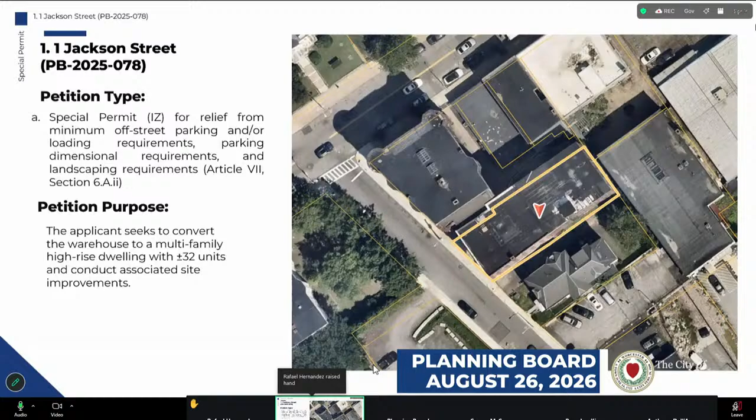Donald O'Neill, lawyer here in Worcester, here this evening on behalf of the applicant, in this case, Jackson Street Apartments, LLC. Also with me is Michael O'Rourke, who's the manager and principal of Jackson Street Apartments, LLC. Available online is Rafael Hernandez from Acropolis Design, who has prepared the architectural plans for this project, and Victoria Epstein from Creighton Manning Engineering, who did the transportation management plan. She is available for any questions you may have for her.

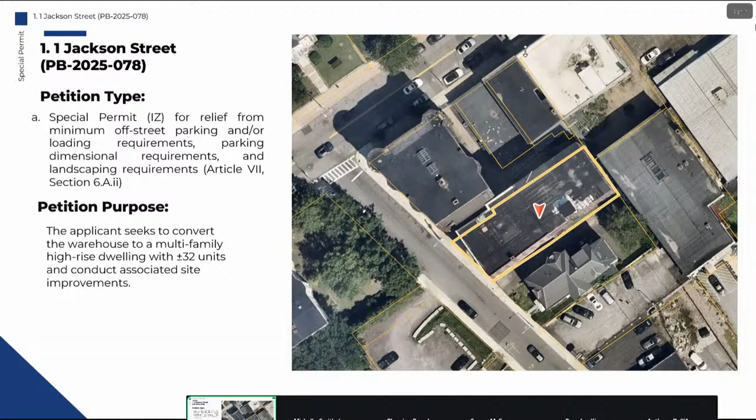I did speak with both of them. There were a couple of questions we had from staff today regarding the architectural plans, which Rafael is here for, and Victoria can address any questions regarding the transportation management plan. One of the conditions of approval we'll get to is for an updated plan reflecting the change in the percentage of units which would be affordable, and she can address any questions you may have concerning that. This property is an existing old apartment building that was eventually converted into warehouse use in, we believe, 1969.

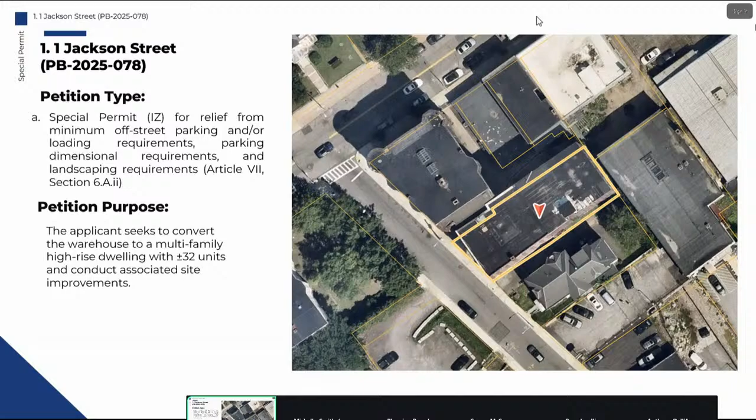Upon original construction, it was 5 apartments, 1 for each floor. The records indicate that in 1912 or 13, it was converted to 12 apartments and remained in that configuration until 1969. What we're looking to do now is convert back to 32 apartments. The breakdown on those apartments is 9 studio units, 14 one-bedroom units, and 9 two-bedroom units.

There is no parking available on site. Basically, the building occupies pretty much the entire lot. So what we're seeking from the board is a special permit for a reduction of 16 parking spaces. We have already been to the zoning board and had a reduction through variance of 20 parking spaces for that location.

This special permit we're requesting now is available to the applicant because of the inclusionary zoning compliance that we have submitted. The idea basically is these apartments would be rented to people without cars. There is no available parking on site. However, there's a need for apartments, particularly ones with an affordable component, and in fact this unit may have a greater percentage than the formal requirement needed for the inclusionary zoning.

It's a strong likelihood that the percentage of actual affordable units would be greater than that. However, they would not be deed restricted for the 30-year period. People would know going in that there is no parking, so they wouldn't rent, or they would make their own arrangements with respect to parking off-site in a garage or some other location.

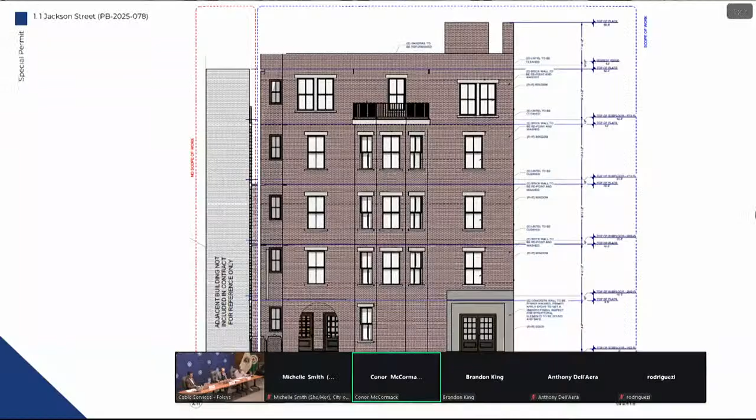Mr. McCormack, it is a public hearing, if you'd like to make a motion. All right, I make a motion to close the public hearing. Second? On the motion: Mr. McCormack, yes. Mr. King, yes. Mr. Dell'Aera, yes. Mr. Toomey, yes. I vote yes. 5-0, hearing is closed.

I would make a motion to approve the special permit for 1 Jackson Street, subject to staff recommended conditions of approval on pages 2 and 3 of the staff memo, with amendments to condition 6 regarding the bicycle spaces, and to incorporate the DTM memo dated July 17th, noted in condition number 2.

Second? On the motion: Mr. McCormack, yes. Mr. King, yes. Mr. Dell'Aera, yes. Mr. Toomey, yes. I vote yes. 5-0, that motion passes. Thank you very much.

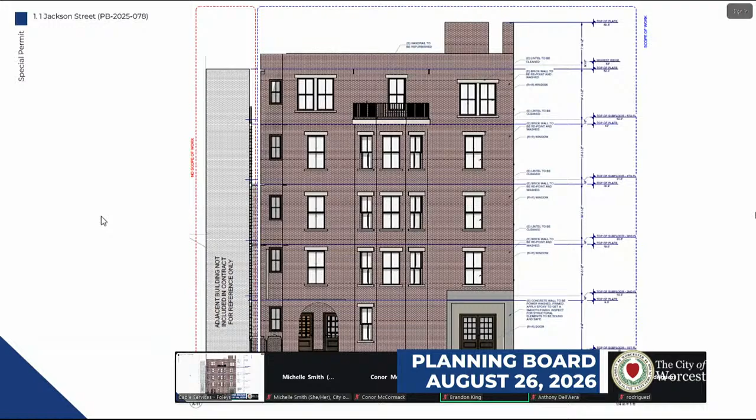Next item on the agenda will be item number 3, 25 through 27 Perkins Street. This is a public meeting for a definitive site plan and a public hearing for a special permit for relief from minimum off-street parking and/or loading requirements related to inclusionary zoning.

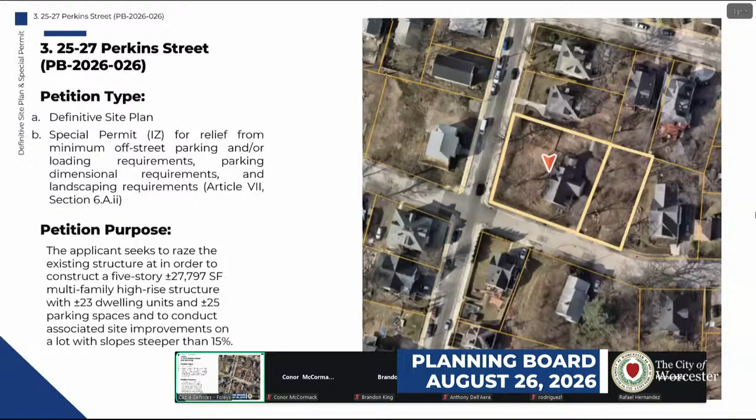Good evening. My name is Jacob Lemieux with Hancock Associates at 315 Elm Street in Marlborough, Mass. I'm the civil engineer on the site project. Also on the phone today is Acropolis, who is the architect. Are you able to pull up the— oh, you've already got that up. So essentially the petition is the demolition of the existing 3-story, 3-unit building and the construction of a five-story, 23-unit building.

under the inclusionary zoning benefit parking reduction regulations. We're proposing 23 units, 5 affordable units with 25 parking spaces proposed inside the building. There are 2 site driveways. The building is steeply sloped up as it goes up Perkins Street, so the building is sort of tiered into that slope, as you can see here. There are 2 curb cuts from Perkins Street that lead to the 2 levels of garage.

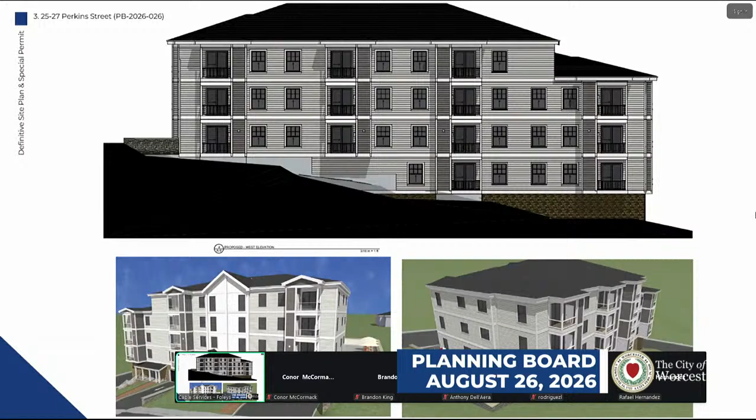Yeah, this is good. Can you go to the Perkins Street side? Or, oh, this is Perkins Street, looking up towards Perkins Street. If you want to go to the next slide—these are the views from Perkins Street on the bottom left-hand corner, and from the abutting house to the north on the bottom right-hand corner. There's an external patio area there, outside of the building for residents, that sits on top of the parking garage underneath it, which helps bring the massing of the building back further away from that property line while maintaining some structured parking there.

If you want to go back to the site plan. So near the main entryway, we've got proposed parking, or bicycle parking spaces, for about 10 bicycles. We've also got about 15 inside as well. So that would be about 25 bicycle parking spaces inside and outside of the building. If you want to go to the next slide.

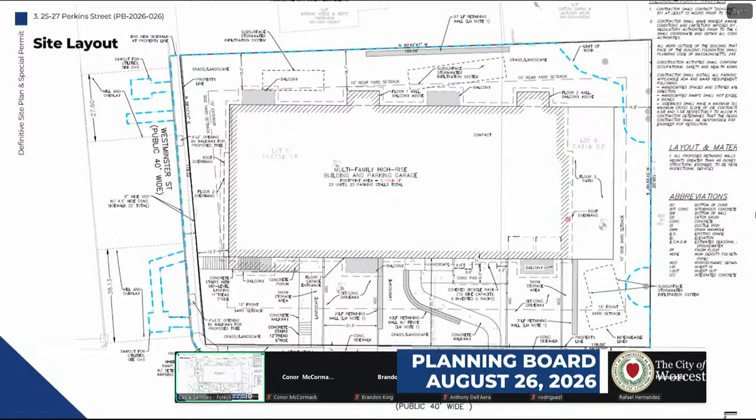Stormwater management on site is just handled by 3 small SC310 chamber systems, which are chambers buried under the ground that provide stormwater storage. We're providing treatment to the runoff that we're generating on site, and also reducing or matching the flow rates to the municipal system to what currently exists.

If you want to go to the next page. We're also providing a robust planting plan. We've got landscaping all the way around the structure, a landscape buffer buffering the patio area, and taller landscape buffers on the other side to help hide that taller wall section. We've also got a staircase that goes to Westminster Street, so there's some pedestrian tie-in to Westminster Street from the entryway. If you want to go to the next sheet—this is just the maneuvering plan.

So I was hoping you had the photometric plan.

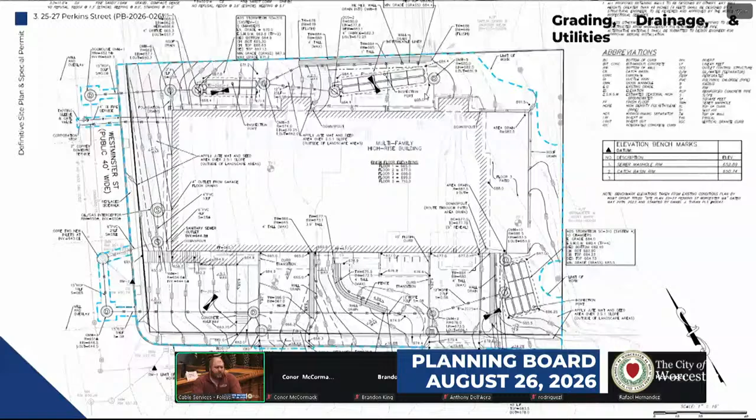Oh, the trash, yes—there's an internal trash room, if you go to the second floor, it would be in the architectural plan. Up one—yeah, right there is a trash room that the trash will be kept in.

Okay, the only other thing I thought you might want to mention, there's a question about adequacy of both fire hydrants and utility availability. That seems like it's under your purview. Yeah, and we have adequate flow capacity there. There's an 8-inch water main, which is certainly sufficient size for a project of this type. And this project's been reviewed by the DPW, and they're satisfied that the available utilities will be sufficient for the project.

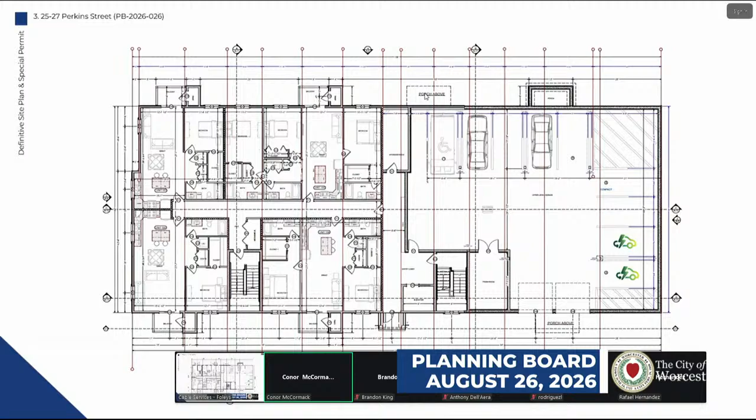In terms of the site plan, I think the applicant did a fairly good job constructing a building of this size on the site. I did have one question. The ground floor along Westminster Street, what's the material for that? It kind of looks like a foundation, and I'm curious what that would feel like along Westminster Street. I just didn't want it to look like a basement facing the street.

Rafael Hernandez, Acropolis Design: Yeah, it's a stone veneer material, and there will be openings on that facade for windows, so it shouldn't feel too much like a high barrier wall. It'll be a natural looking material. It hasn't been finalized, but it's probably going to be Boral, a product mechanically fastened to concrete so we don't have a lot of exposed foundation. It looks natural and will tie to the ground and the landscaping around it.

Okay, thank you, I appreciate that. I just wanted to make sure there was a little bit of fenestration along that frontage. I was concerned about the Westminster side, but I see there are some windows there, so that plus the landscaping satisfies my concern. I do appreciate this is a much larger building than what's typically in the area, but it complies with the site plan review requirements, and I would be willing to support it.

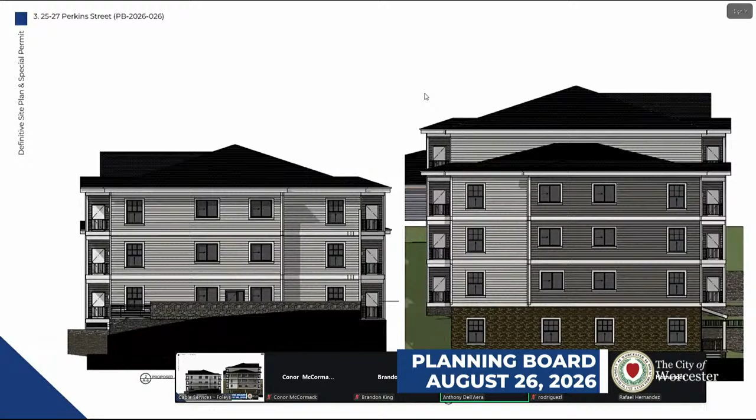Thank you, Mr. Dell'Aera. Mr. Toomey? One question relative to the parking, it's pretty much one space per unit. Will those be assigned spaces, one per apartment, or first come first serve? If someone has 2 cars, one will be rented without parking. We're indifferent, so it may be best to assign the spaces, that way everybody knows where they're going, and the visitor spaces stay open.

The concern is, the previous applicant mentioned renting without specific restrictions on leasing. It'll be tied to their lease, one per apartment. Yeah, for that, I think we'll be happy to do that. Other than that, I'm supportive of it.

Thank you, Mr. Toomey. Mr. Rodriguez? No further comment. Thank you.

Okay, for myself, I thought Mr. McCormack's point was a good one about the Westminster Street facade. Looking at your planting plan, I see some utility infrastructure on that side, below where those windows are that look into the parking garage we're looking at on the screen right now. I'm wondering, is it possible to add some plantings there to soften that a little bit at street level? Could you pull up the planting plan, please?

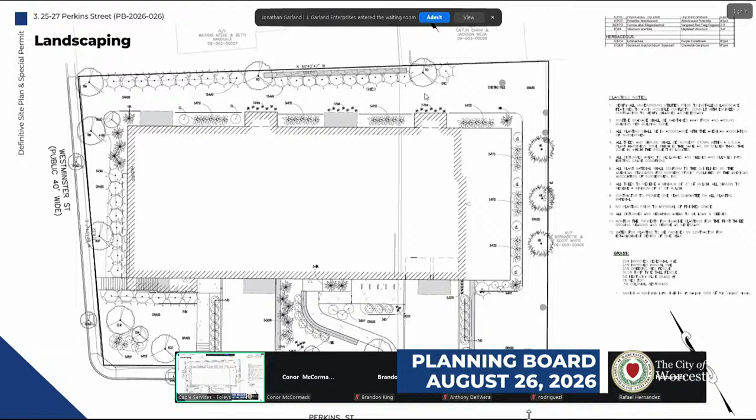Second? On the motion: Mr. McCormack, yes. Mr. King, yes. Mr. Dell'Aera, yes. Mr. Toomey, yes. I vote yes as well. That motion passes 5-0. Thank you very much.

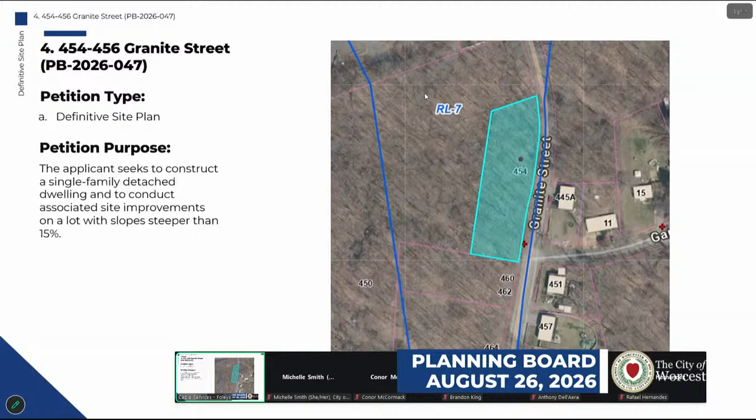Good evening. My name is Robert Murphy with Murphy Associates Environmental Consultants. I'm here this evening representing Mike Pizzarella for a definitive site plan approval for a single-family house, 454 Granite Street. Just to let you know, we have been before the Conservation Commission, and they approved the project. However, they had made a request that we change the duplex house, the original design, to a single-family house, and we are in agreement with that.

The application that we have tonight is for a single-family house. We will be going back to Conservation and getting an addendum to the order for a single-family house.

A quick description: this is Granite Street off of Route 20, fairly close to the lights near Cliff Street. It is a wooded lot fronting on Granite Street.

If you look at the plan, you'll see to the rear of the property is a wetland that has been reviewed and approved by Conservation. The forward portion of the house would require a septic system. There is no sewer available on the street. There is an 8-inch water line with plenty of capacity for the local neighborhood and this additional home.

On-site drainage: all drainage from the rooftop goes into a dry well system, a stormwater management dry well system. As I mentioned earlier, there's a septic system approved, a Title V system, which meets all Title V requirements.

We're essentially here tonight requesting site plan approval because of the slopes at the site, the rear of the site. In order to develop the front and have no impact on the wetlands, there's a significant slope in excess of 15%, which I believe is the cutoff for that requirement. There's erosion controls all along the back side, and again, that has been approved by Conservation. So with that, I will answer any questions that you may have.

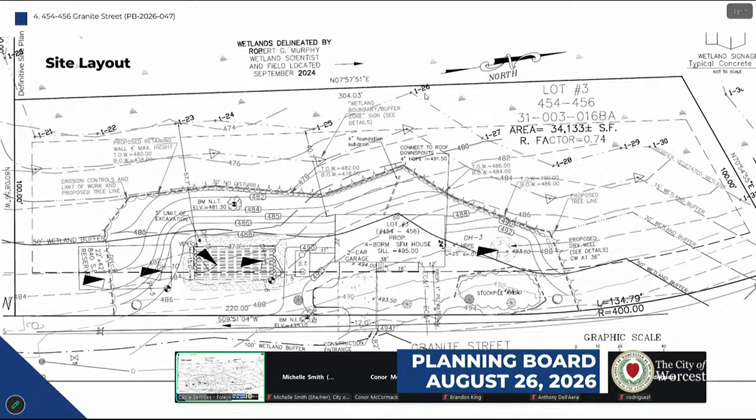Mr. Carey asks, as long as the board is comfortable with that, does that mean there's sort of weep holes in the wall where the water will be seeping out of? Mr. Carey is asking how exactly the system works, whether there are weep holes and how the water gets out of the wall.

The blocks themselves are not tight to each other, creating a toothed effect, but they're not watertight. There are weep holes built into the wall, best way to describe it. It's been designed specifically so there's not a surcharge of water behind them.

I'm satisfied with that if the board is. Would it be possible to reflect the weep holes on the plan, showing where those are going to be located along the wall? We could add that to the plan.

So why don't we modify condition D to read 'reflect weep hole location' rather than the toe drain daylight location. We could have it as a condition. We approve it as a condition. Yeah, that's what Mr. Carey is suggesting, sounds like we can do that.

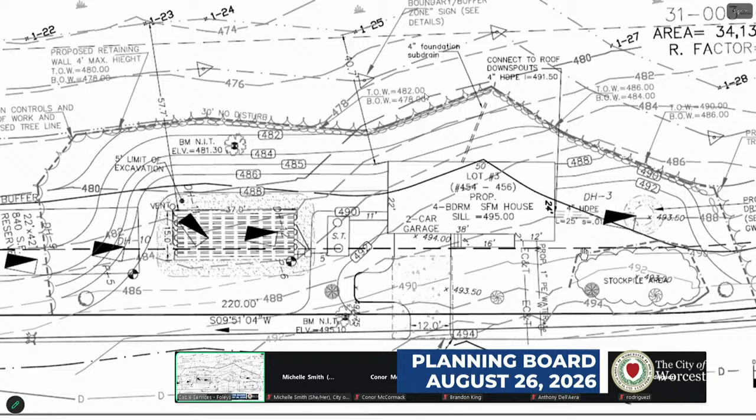On the motion, Mr. McCormack? Yes. Mr. King? Yes. Mr. Dell'Aera? Yes. Mr. Toomey? Yes. I vote yes. That motion passes 5-0. Good luck, thank you very much.

Moving on, next item is number 7, 23 through 37 Boylston Street, a public hearing for a definitive frontage subdivision plan.

Do we have someone from the applicant online, maybe? Yes, good evening, Mr. Chair. Hi, go ahead, thank you. Good evening once again, Mr. Chair, members of the board. My name is Matt Eckel.

I'm an attorney with Fletcher Tilton on behalf of the applicant. I'm here before you tonight seeking approval of a definitive frontage subdivision plan for the property known as 23-37 Boylston Street. Just for the record, we've been working with the city to readdress this because the odd numbers don't make sense on the side of the street, so going forward it will be known as 24A through 34B Boylston Street.

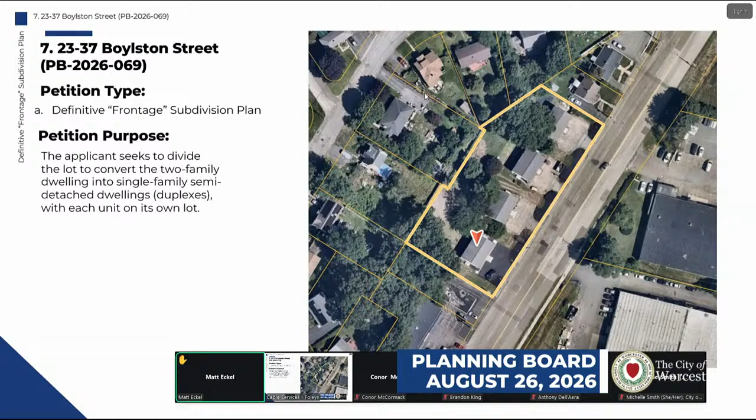By way of brief background, this project includes dividing the existing 42,000 square foot lot, which you can see on your screen, into 8 new lots. This will allow the pre-existing structures to become 8 semi-detached one-family homes on their own distinct lots. Previously this was 4 two-family homes on that 42,000 square foot lot, so this is being done to provide home ownership opportunities by separating these 4 two-families into 8 single-family semi-detached homes.

We did receive relief already from the Zoning Board of Appeal for frontage on all 8 proposed lots, as well as lot area for what was known, or is still currently known, as 35 and 37 Boylston Street, which are the top 2 on the right, because you can see that slope kind of towards the rear of the property line. Those had slightly less square footage, but that relief was all granted by the ZBA previously.

This project doesn't really include any work at all. There's no road construction, even though it's under a subdivision. It's a definitive frontage subdivision plan. There are no new structures, but the structures that are existing are ready to be inhabited and occupied, as single-family dwellings. We reviewed the staff's proposed draft decision and have been working with staff. For the most part, we have no issues with it as proposed.

We did want to at least have a discussion relating to the condition for the proposed new trees. We understand there's a subdivision regulation for a tree every 50 feet in the front yard, and certainly understand the value of having more trees in the city, and understand why this is a request and is a consistent one. But this is a bit of a unique situation. As mentioned, there's no work to be done at all. These are all existing homes, existing driveways, existing landscaping and trees already on site with no proposed changes. This request is really just to take the buildings to 8 new homeownership opportunities.

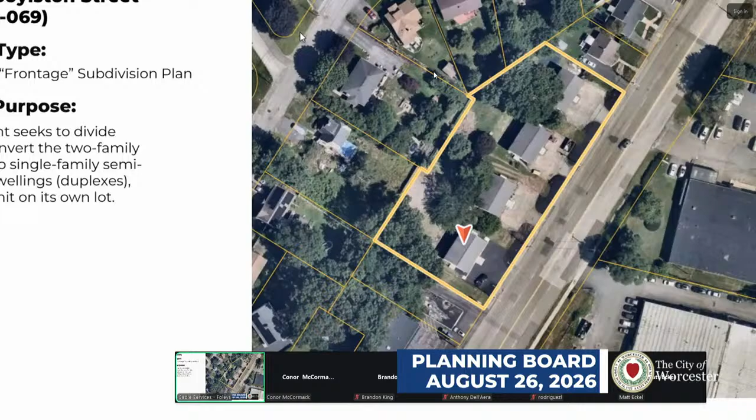Mr. McCormack, I think we're ready for a motion. I would make a motion to close the public hearing. Second. On the motion: Mr. McCormack? Yes. Mr. King? Yes. Mr. Dell'Aera? Yes. Mr. Toomey? Yes. I vote yes, 5-0. The hearing is closed.

I would make a motion to approve the definitive frontage subdivision plan for 23 to 37 Boylston Street, subject to staff conditions in the draft decision on pages 1 and 2 of the staff memo, with the amendment to condition 1E regarding trees as discussed.

Second. On the motion: Mr. McCormack? Yes. Mr. King? Yes. Mr. Dell'Aera? Yes. Mr. Toomey? Yes. I vote yes, 5-0. That motion passes. Good luck to them—thank you very much.

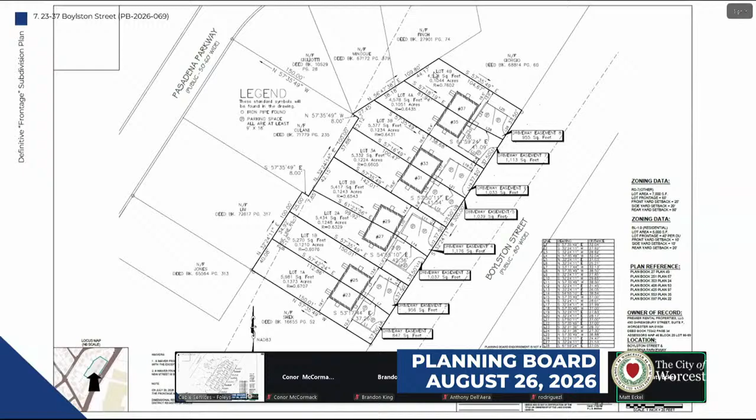Moving on to item number 8, which is 11 Cliff Street. This will be a public meeting for a definitive site plan, an amendment to a definitive site plan.

Good evening, Mr. Chair, members of the board. For the record, Mark Borenstein, an attorney at the law firm Prince Lobel here in Worcester, representing the applicant Lilly LLC. This evening I'm joined by the principal of Lilly LLC, Daniela Matos. Before you is a minor site plan amendment to a commercial development at 11 Cliff Street.

After the approval was granted, there was some site work done. They determined there were large boulders on site and ultimately used them for portions of the wall. Inspectional Services came out and determined that required an amendment. So the modifications to what was previously approved include that riprap boulder wall, and there is now a septic system proposed on the site. Otherwise, we're not making any other changes to the proposed development.

We've reviewed staff's recommended conditions of approval. We do have some questions and comments, so we're happy to address those after staff has provided their comment. Sure thing, let's go to staff.

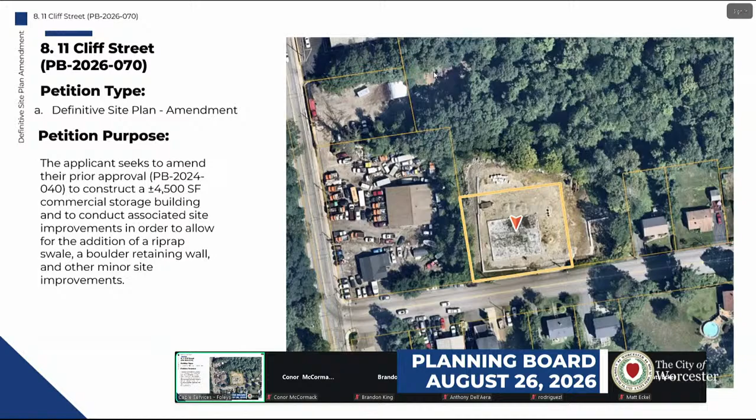Steve Carey, Planning Division. This is an amendment to a site plan approval. On the approved plan there had been a sort of tiered wall system initially approved for this side of the site. It's now a riprap slope going down to a boulder wall. We've had a site inspector go by and flag that. ISD has talked to their structural engineer, and they're comfortable with the stability of the slope.

Just for an abundance of caution, we've added a condition that, prior to issuance of the certificate of occupancy, that same or another professional structural engineer provide a letter certifying that the slopes remain stable.

The other change, as Attorney Borenstein noted, is that there's now a septic system proposed. My understanding is that when this building was initially proposed, it was going to be a dry building, but now there must be some sort of bathroom or kitchen in there. They have a water line connection and now a septic system. ISD also reviewed that, and we heard from them today that they didn't have any major concerns with the way the septic system is laid out.

With regards to the conditions of approval, I'm glad to talk about whichever ones the applicants wish to discuss. They are largely just carried over from the prior approval. Some I was able to strike based on what was reflected in the amended plans, but a few had not been satisfied by the revised plans, and that's why they remained carried over.

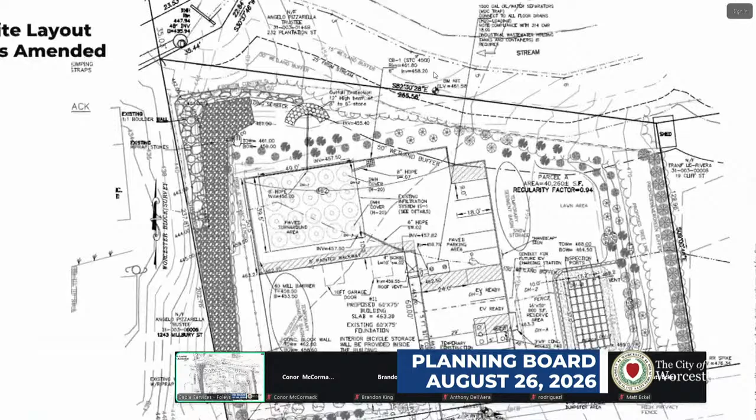With respect to 1D, just to provide some additional information regarding the different wall drains, there is some drainage associated with that major retaining wall — I say major retaining wall, the non-riprap or boulder wall. There is an outlet in the riprap swale, but in terms of the riprap swale itself and the boulders, they're perforated with filter fabric, so there wouldn't be an outlet for that. But we're happy to add the drain outlet with respect to the retaining wall itself.

So if that's what staff is requesting, maybe we could just clarify that it's wall drain outlets for the retaining wall? Sure. Great.

In terms of 1Q, there's a request to provide covered bike parking for employees or visitors. We're not anticipating any visitors to the site — this is really a commercial space for the employees of the business, and employees certainly can park their bicycles in the building itself. So we would ask that that be struck as well, if acceptable to the board.

With respect to 1R, we added 2 EV-ready parking spaces based on the prior approval. It seems now there's a request for an EV charging space. This is really just a dispatch location for this landscaping business, so we would respectfully request to keep the 2 EV-ready spaces as shown on the plan and strike 1R.

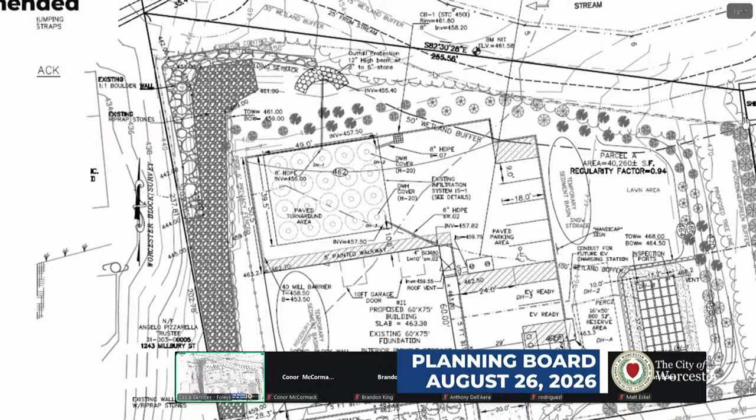And with respect to 1V, there's a comment from DPW to keep trees at a minimum of 10 feet from the water line location. My recollection from the previous approval was that staff requested shrubs and a tree in front of the proposed building. I don't believe there was previously a water line, so that's a new addition. We're happy to remove the tree and the shrubs, and we defer to the board and DPW as to what they would prefer in terms of removal of the vegetation.

Staff: Sure, I can respond. I guess with regards to 1Q, bike parking, whether covered or not, I defer to the board as to whether you feel that's something you'd want to see at a site like this. My understanding is it's storage for a landscaping business. I think with 1R, we're comfortable striking that.

Assuming the board agrees, but we'd of course defer to the board. And with regards to 1V, I imagine DPW was reviewing this and hadn't seen our conditions around those trees, which were from a prior iteration of this memo back when this was approved in 2024. So I think we'd be okay with removing the proposed trees only as necessary to keep them 10 feet from the water line.

Through the chair: so we'll keep the shrubs but lose the tree? Is that what we're proposing, or what staff's recommending? Which tree specifically are you referring to? I think that's it — is that the one here?

That's the tree the engineer flagged for me as within 10 feet. Can that tree be shifted to be 10 feet from the water line? I think that's fine, we're happy to shift it. So then I think that condition can remain. The shrubs, though, might be within 10 feet. I don't think shrubs are an issue for DPW, but I defer to DPW.

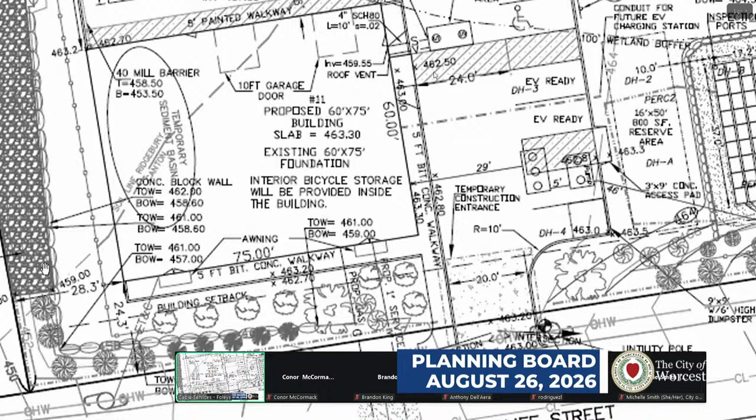And then I defer to the board with respect to 1Q and 1R and the other requested changes. I can speak for myself. 1R, I'm fine with, you have EV ready there. This condition actually says recommend they consider installing. You have installed EV ready spaces, which means conduit. If the demand meets it, then you can put in an EV charger. I'm okay with that. As far as interior bike parking is concerned, it actually says that on the plan.

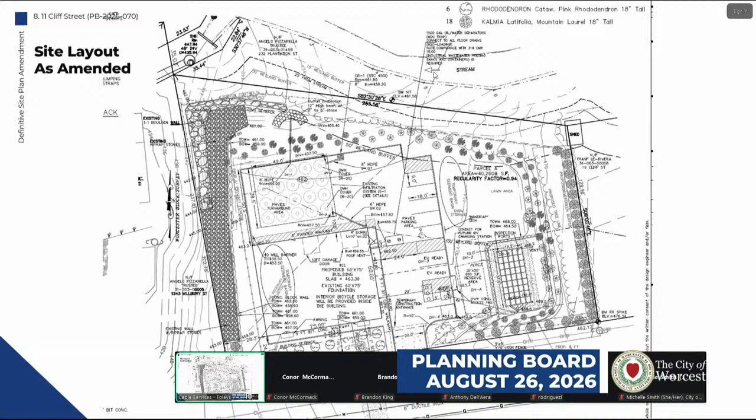It seems reasonable to me that they can park their bikes inside the building, unless anybody has an objection to that.

So I guess other board comment on this. Mr. McCormack, do you have any issues? No, I would agree with your assessment and happy to support. Thank you. Mr. King? Thank you. Mr. Dell'Aera?

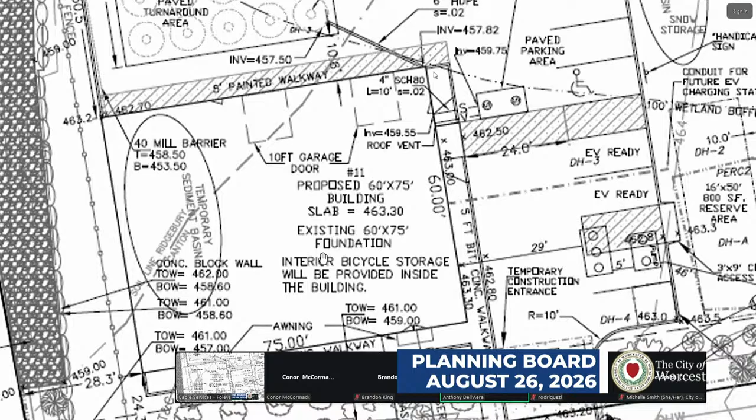Thank you, Mr. Chairman. To go back to 1R, could I get clarification? So the EV readiness remains, and the request is to strike the requirement for one online charging station. Have I read this correctly? Correct. My understanding is the original approval required two EV-ready spaces. That's what's been built. I'm not sure how this condition snuck in, but the condition now says DTM recommends they consider making one of those fully operational, which is a little bit of a confusingly worded condition, if you ask me.

But I think what we're saying is EV-ready was the original intent, and we're fine keeping that in. Okay, so as long as it remains EV ready, I'm happy to support that. Yep, thank you.

Mr. Toomey. This is a location I drive by two to three times a week. I'm impressed by anyone that can ride their bike up and down Cliff Street on a regular basis. That's a fair assessment. Yeah, so no comments and ready to support. Thank you, Mr. Rosende. No comment, thank you.

Okay, Mr. McCormack, I think we're ready for a motion. I would make a motion to approve the definitive site plan amendment for 11 Cliff Street, subject to staff recommended conditions of approval on pages 2 and 3 of the staff memo, with amendments to strike condition 1C, amend condition 1D and 1Q. Did I get that? To strike 1Q, sorry, and 1R, and to amend 1V.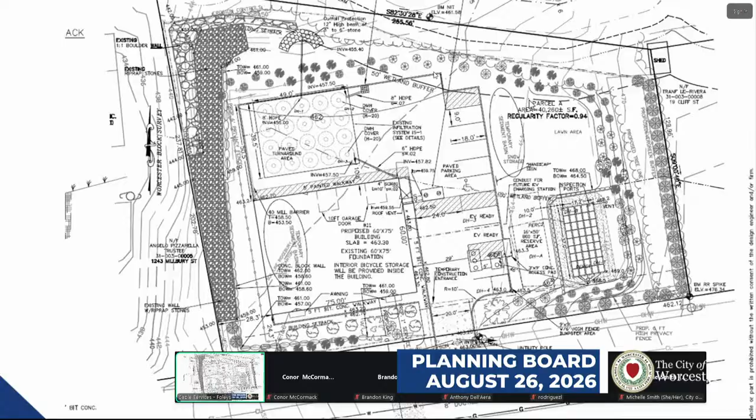Okay, next up we have three separate zoning map amendments. I understand there's some folks in the audience here on these items tonight. I just want to give you the overview before we get into each individual one. So what happens is an applicant proposes that we make a change to the zoning map. They propose that to City Council. City Council sends it to us, the planning board. We're volunteer citizens, not unlike yourselves. They want us to make a recommendation back to them. Whatever we say, whether we support it or not, they in theory consider that. Then they send it to a subcommittee, and it comes back from the subcommittee to the whole council, who ultimately decide whether to grant the zoning map amendment. Appreciate you guys being here, by all means we'd love to hear your comments. Just want to be clear, whatever vote happens tonight, there's still a few steps in the process before anything ultimately happens. So that said, we're going to start with number 9, which is 25 West Chester Street, public hearing for a zoning map amendment.

Thank you for that overview, Mr. Chair, it's helpful to the neighbors in the audience. For the record, my name is Joshua Lee Smith. I'm an attorney with the law firm of Bowditch and Dewey, and I'm here tonight representing my client, CMS. To my left, sitting over there, is Jerry Kavanaugh, one of the principals in connection with the project contemplated for this site. As you mentioned, Mr. Chair, this is not an application for site plan review, nor is it an application for a special permit or variance or any other type of zoning relief. We're here to hopefully gain support from this board with respect to a proposed zone change pertaining to this site.

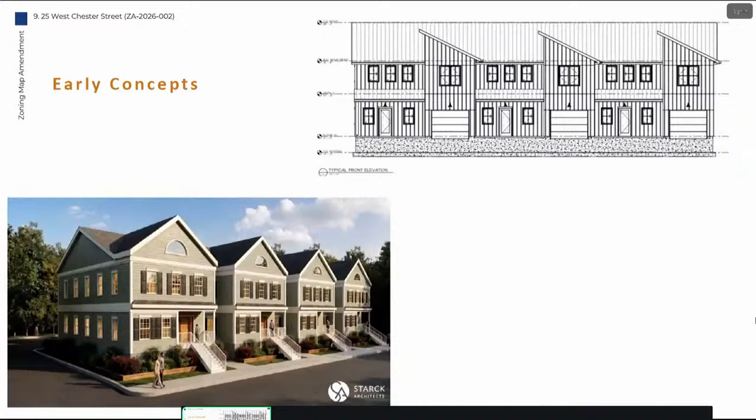Steve, if you go to the next slide, again, these are early conceptuals, a couple of potential illustrations of possible designs for the townhouse portion of the project.

I'll get to the real crux of the matter with respect to the actual zone change itself. Steve, if you could just go back to the zoning map. So I think I may have mentioned this, or Mr. Chair, you may have mentioned this - the property is currently within the RS7 zone. The request here is pretty straightforward: we're looking to have the entirety of the property changed, modified, or replaced to the RL7 zone. Generally speaking, the RS7 zone is the city's most restrictive in terms of it allows for single-family dwellings.

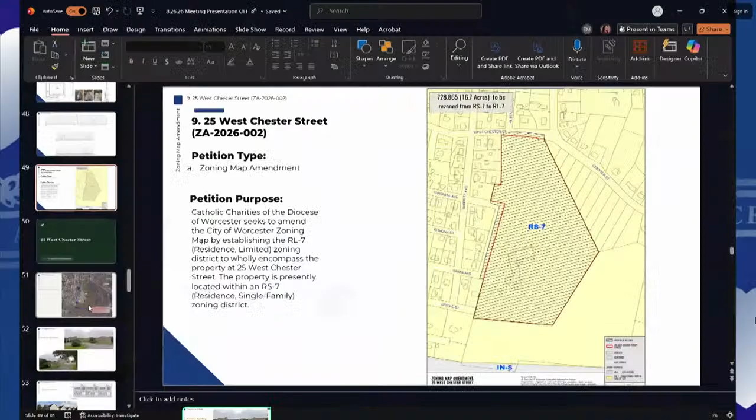RL7 is a little bit more limited by its name. It's called residence limited, so it doesn't allow the most density, unlike an RG5. But the RL7 does allow for the construction of low-rise multifamily as well as townhouse-style units.

I want to underscore that if the zone map gets approved to RL7, those two types of dwellings would still require a special permit, including site plan review. So the board and neighbors would have multiple bites at the apple through design review and vetting of the project. This is really just an early initial step.

I want to say briefly, with respect to working with the community, my client has had several meetings, both group sessions and individual one-on-one meetings with the neighbors. Councillor Economo is here tonight as well, and he has helped facilitate those meetings. So they're fully aware of what we're looking to do here.

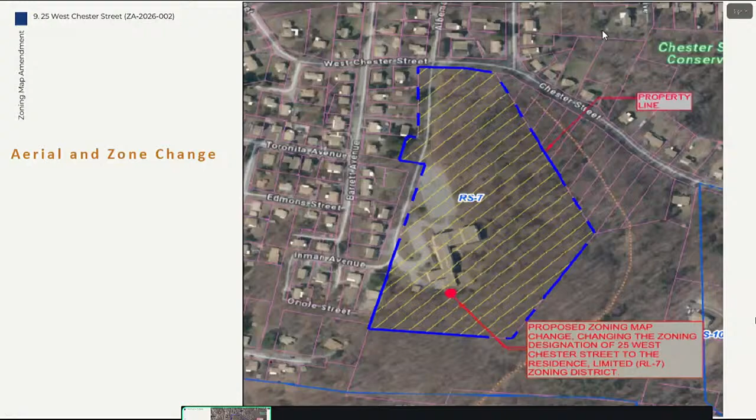We've been open and fully disclosed what's potentially contemplated. We received a lot of feedback, not necessarily about the site or the potential project itself, but about other neighborhood-related issues off-site, some pertaining to West Chester Street itself, which has challenges—it's very narrow in certain areas and very steep in certain areas. There were comments about the narrowness and steepness of the street and surrounding streets, as well as issues with plowing snow during winters and stormwater.

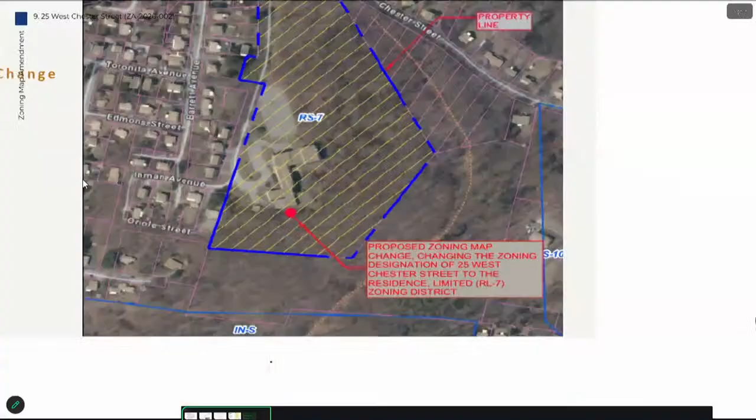Some comments were on-site related, and some were off-site related. For the off-site issues, I think it's safe to say my client and the neighbors have aligned interests to see those issues improved to the extent they can be. We've had several meetings with the neighbors, it's an ongoing dialogue, and we're happy to continue working with them as we progress through this process. That's all I wanted to say. Thank you, Mr. Chair.

Moving over to staff comments on this item.

Through the chair, this is Olivia Houle in the Planning Division. I want to start by noting this petition was initially submitted to consider establishing the adaptive reuse overlay district, and it was advertised that way originally. After going through the advertising process, the petitioner met with neighbors, and as a result of that discussion, the petition was amended to instead establish the RL7 zone. So I wanted to start with that clarification.

To go over permitted uses in the existing RS7 zone versus the proposed RL7 zone: the RS zone is one of the more restrictive residential zoning districts in the city, allowing only single-family dwellings and some exempt uses by right. The RL7 zone is less restrictive, allowing two-family dwellings and duplexes by right, and three-family dwellings and low-rise multifamily structures by special permit. There are also some business and general uses allowed by special permit, including nursing homes, funeral homes, and personal service businesses, which would not be allowed in the RS7 zone. Otherwise, other uses are pretty much identical across all categories.

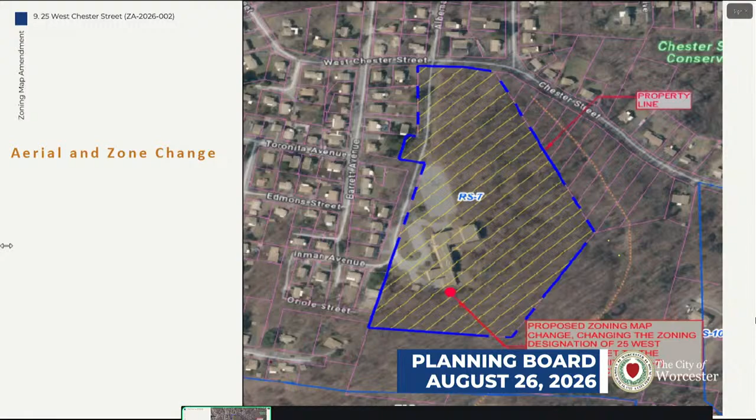Look, for my comments, planning staff knows this, and I find zoning map petitions to be incredibly frustrating. I've been on this board for 8 years now and sat through a lot of changes. I have a background in housing development, specifically affordable housing, and that's why I got involved to volunteer my time in service of my community, because I thought that was a worthwhile effort. But these are a really bureaucratic thing. Zoning, ultimately, the changes we make now result in the city we're going to have in 20, 30, 40, or 50 years. I think that deserves consideration, and careful consideration.

Where I get frustrated is really two places. A zoning map amendment is a 3-stage process typically, where it goes to council first, comes to us, goes back to council, goes to a subcommittee, and then finally gets voted on by council.

My first frustration is that to me feels disingenuous. It feels like a pressure valve, like this board exists, this meeting that you've all come to tonight, to vent your frustrations with all the different things that the city has failed your neighborhood on over however long you've lived there, some of you very, very long. You come here and vent that frustration tonight, and then you go to the subcommittee maybe and vent that frustration then, and you go to Josh's neighborhood meetings and vent that frustration then, and by the time it actually gets to the vote, the people you elect will have had that effect dampened. And I'm not speaking of your councilor in the back of the room, I'm speaking of the council at large. So in that respect, I feel we've all just wasted each other's time for the last hour. And I don't like that. So that's a source of frustration for me.

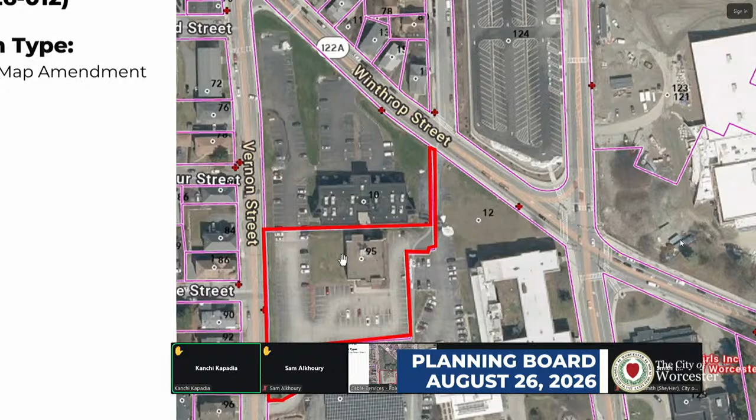Because we really only received this information over the past week and a half to two weeks, saying they are planning to redevelop in a different way than originally intended, we probably just need a little bit more time to make sure our interests are protected. We want to make sure that if it becomes condominiums, residential housing, or something besides medical or dental offices, that parking spaces and shared resources are taken care of before moving forward. So at this point, we're just asking for some more time. Thank you for that.

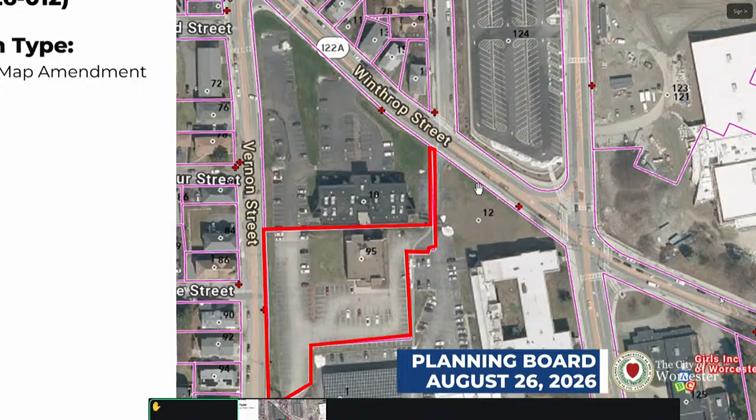First of all, I do want to underscore, I know the members realize this, but to the public and to the neighbors here, especially the ones that just spoke, these are two completely separate petitions. The petition that is item number 11, which the board is going to hear next with respect to 128 Providence Street, is a completely separate and apart petition. I mentioned that just because someone had mentioned these are somehow connected, and they're not.

A lot of the comments we just heard are, in my view, private party related matters, private property rights related issues. I have some knowledge of ongoing communications between the two property owners relating to separate things like separation of utilities. I'm not aware of parking or other utility related matters, expenses, those types of things. I have no knowledge of that, but I do know there's an ongoing dialogue between the two property owners with respect to those matters.

Those issues have nothing to do whatsoever, respectfully in my opinion, with a petition for a zone map change. And I'll say that the zone map change we're requesting is not a change at all with respect to the underlying zone. So again, the current zone is a BO 2.0. The petition has nothing to do with changing the BO 2.0.

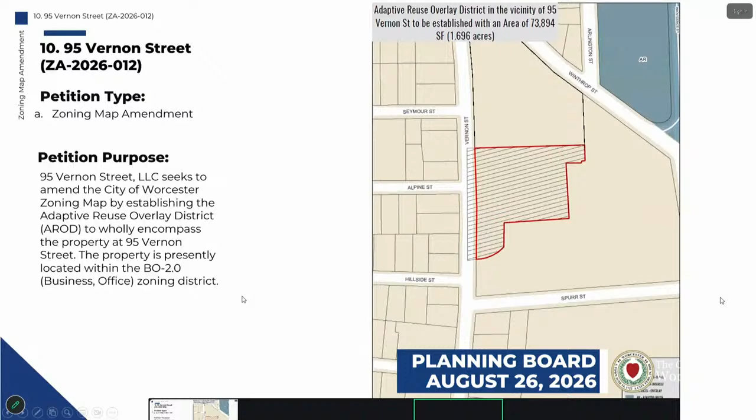On the motion, Mr. McCormick? Yes. Mr. King? Yes. Mr. Dolera? As a Red Sox fan, this is the only kind of A-Rod I would say I'd support. Yes. Mr. Toomey? Yes, I vote yes as well. That motion passes 5-0.

Moving on to item number 11, 128 Providence Street, a public hearing for a zoning map amendment. Through the chair, this is Michelle Smith in the city's planning division, presenting on behalf of the applicant, which in this case is the city. So the property is here, as you see on the screen, the Worcester Senior Center property, also known as 128 Providence Street.

And the city holds the custodianship of the property through the city manager's office. Our office, the Executive Office of Economic Development, has submitted through the city manager a request to rezone the property in support of the hopeful adaptive reuse of the long vacant piece of the property, which is the former St. Vincent's Hospital nurses building, which, as you know, if you've been to the senior center, is attached to the portion that's occupied and actively used as the senior center.

So the department put out an RFP for responses for redevelopment of this, with a preference specifically for housing for seniors. The most advantageous proposer was selected, which is Rogerson Communities, who has representation here this evening as well, and I wish to speak specifically to their intentions. They're a nonprofit developer based in Massachusetts with substantial experience with affordable and senior housing development.

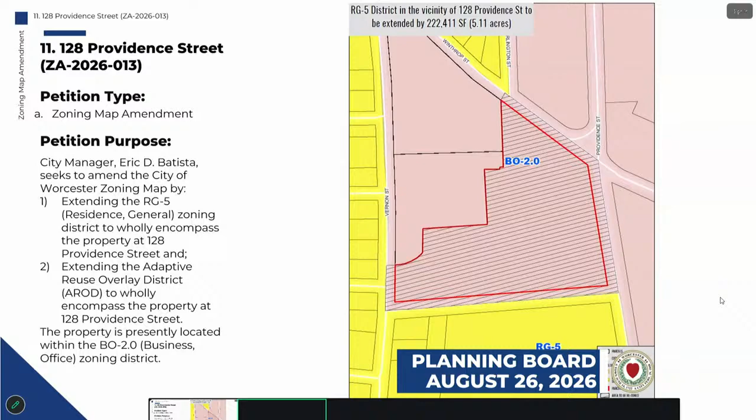So really the purpose of this hopeful zoning amendment the city is putting forward here for your consideration would be to pull this property into the RG5, which you can see is located to the south, and the adaptive reuse overlay, which you can see is located to the northeast. So basically extending the adjacent districts over the property to encompass the entirety of this parcel to enable that redevelopment.

Today, the business office district has restrictions, which my colleagues will talk about from a zoning perspective, but from a reuse perspective, this limits it in order to enable high-rise development specifically. And while high-rise means a lot of things, typically where we see that as a pinch point is 4 or 5 stories. This existing building is 4 stories, and the new addition that they are anticipating would likely be 4 stories or more. So this is a pinch point for the current development and reuse of the site.

So we're hoping to open up that opportunity with the RG5, which would make that by right in terms of the scale of the development, but also introduce the flexibility with the adaptive reuse, given the fact that that overlay is really intended for properties just like this to help adaptively reuse historic buildings. Specifically the nurses building component that's been sitting there vacant and underused. It's directly in line with the purpose and intent of the adaptive reuse overlay. And obviously our larger objectives for housing production, which we've talked a lot about this evening, this really furthers that, and specifically trying to meet a need that we have for affordable housing and specifically housing for our seniors.

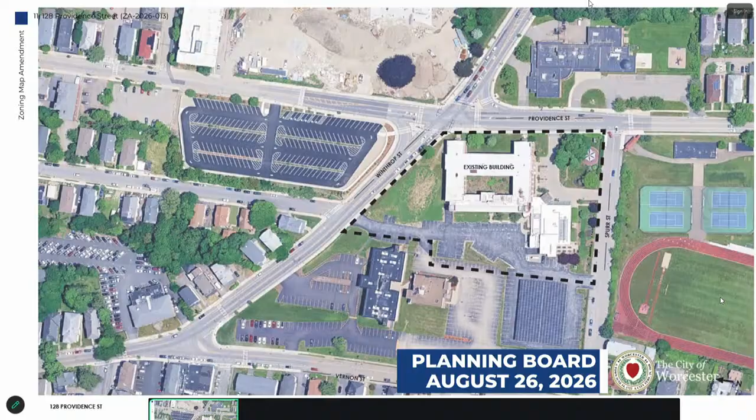I'm not going to rehash what Michelle just laid out very eloquently. I will say that Rogerson was awarded as a preferred developer with respect to the long-term leasing of this site, which includes the conversion of the existing building, known as the nurses' home, and also the development of a ground-up addition as well, as Michelle described. In total, again, 98 residential units as part of this project.

I will just want to add a couple of things. Again, it's a little bit of relaying back to the previous petition. Unlike the previous petition, which if that ultimately does get approved with respect to the map change, would require a special permit for a high-rise multifamily use, we are requesting, in working with the city, that the underlying use here also be changed. So that's a big distinction between this and the last petition.

This particular parcel is also within the business office district, and we're looking to have this be converted to an RG5, which, by the way, Michelle may have mentioned, would also be an extension, because just to the south of this property is also in the RG5. The other extension is the adaptive reuse overlay, which is exactly what the last petition also was requesting.

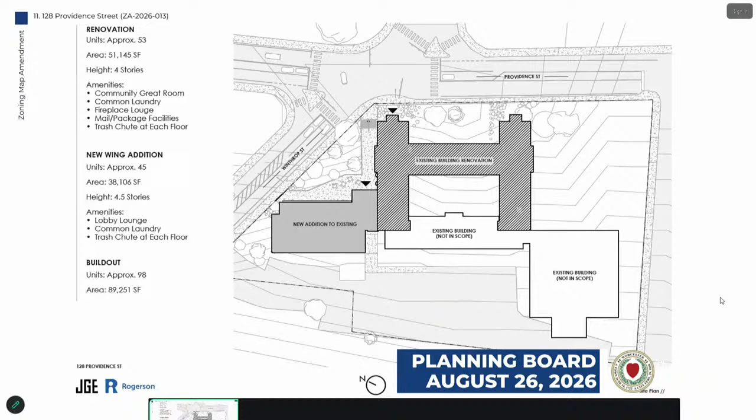So the expansion area, as Michelle had described, is planned here to the west, closest to Winthrop Street. That will be the ground-up addition, so to speak. And then there'll be a conversion with respect to a large portion of the existing building, that nurses home building. Steve, if you could advance to the next slide.

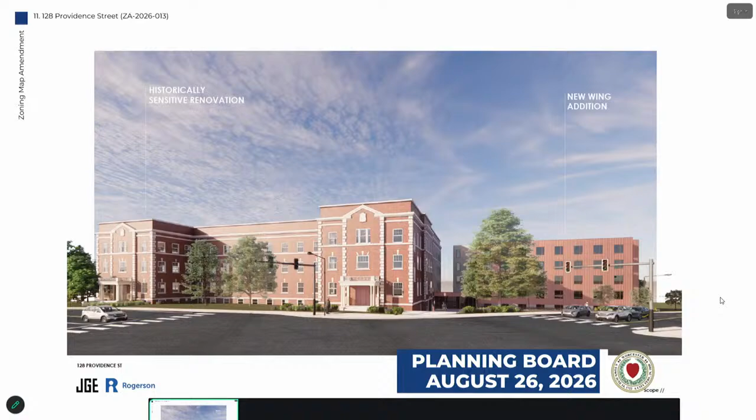And again, these are at the conceptual stage. However, as you can see to the right on this illustration, it's a 3D rendering of what's contemplated in terms of the addition. Steve, if you could advance - and here's another view of it.

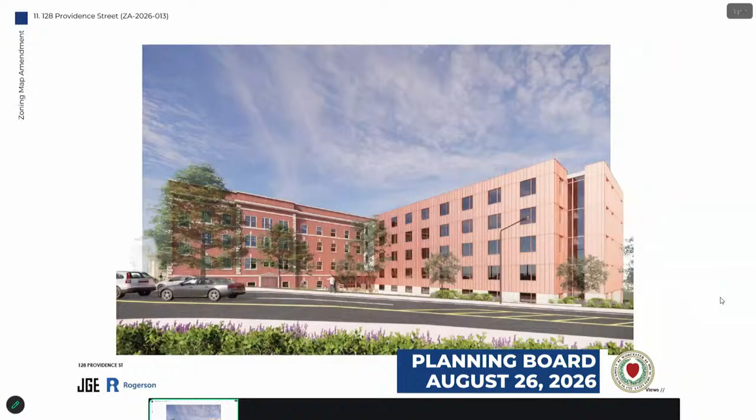And one more. So as you can see, the existing building is a 4-story building. What's proposed is, I think, characterized as a 4+ story building. And again, the new addition is the so-called phase 2 portion, 38,000 square feet, and that will contain 45 plus or minus units, with the balance of the existing building containing 53 plus or minus units, for a total of 98 units.

So we just wanted to share this. Again, my client's still working through final designs both with the city as well as the Executive Office of Livable Communities with the state. And as has been the theme with these last 3 petitions, there will be an ongoing process with respect to design and the board's opportunity to vet the project in terms of ultimate engineered drawings and final architectural designs. Happy to answer any other questions the board may have.

Thank you. Oh, and I apologize, I did want to acknowledge a couple of folks - one in the room and then to my left, and one online. Annika Lambert is online, and this gentleman right here, Ken Crisafulli, is also a representative of Rogerson.

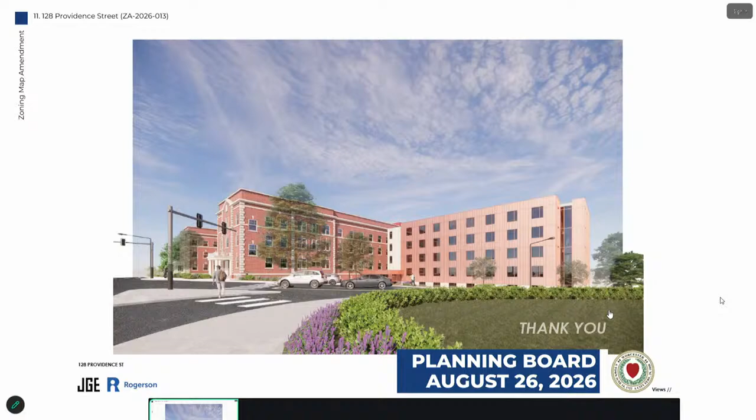Thank you very much. All right, moving on to ANRs.

All right, this is Steve Carey in the Planning Division. I think you've got 6 ANRs on the agenda, but just 4 of them are properly before the board. Let me just advance the slides here. 12A, 52 Butler Street, is not properly before the board.

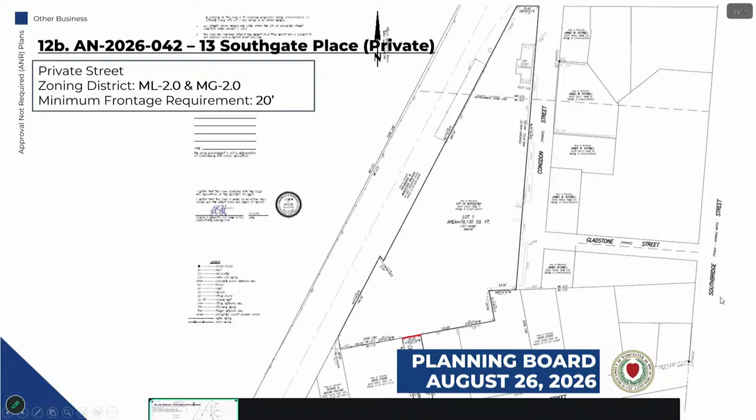12B, 13 Southgate Place, is. This is actually a city property, so the fee, the ANR fee, was waived for this one. Anyway, they are essentially just creating a separate lot by adding this lot line you see in red here. That basically would not be considered a buildable lot.

This is 22 Shaffner Street. This is generally a lot line adjustment, so that the driveway - you can sort of see the curb cut for it - is then wholly on one of the properties. This is RG5. Both have the 50 feet of frontage that they need for a single-family detached home.

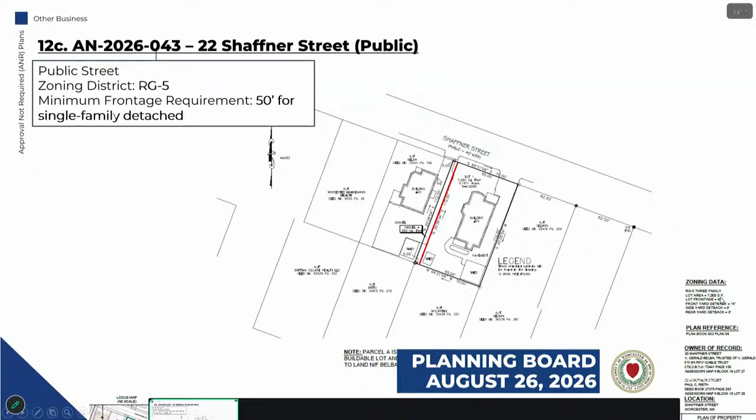12D is not properly before the board. 12E is another lot line adjustment. I think the only lot line that's moving is the one on the left there, shifting slightly to the east. All 3 of these lots will have the 65 feet of frontage needed for a single-family detached home in the RS7.

And then 12F, this is essentially putting in a zero lot line along the party wall between this single-family semi-detached, AKA duplex, leaving both with the minimum 35 feet needed in the RL7 zoning district. So the board's going to be making a motion on 12B, 12C, 12E, and 12F.

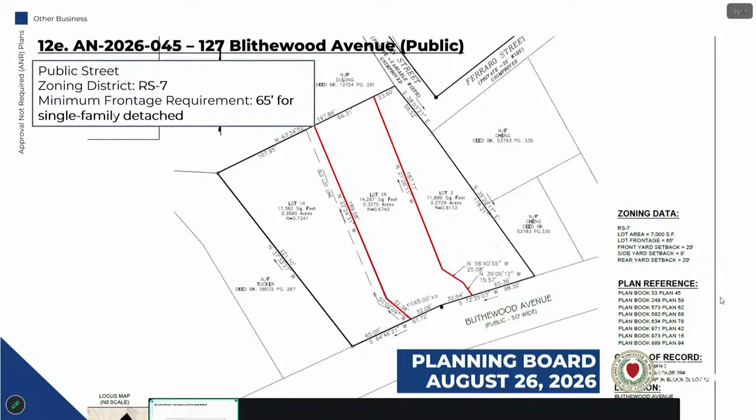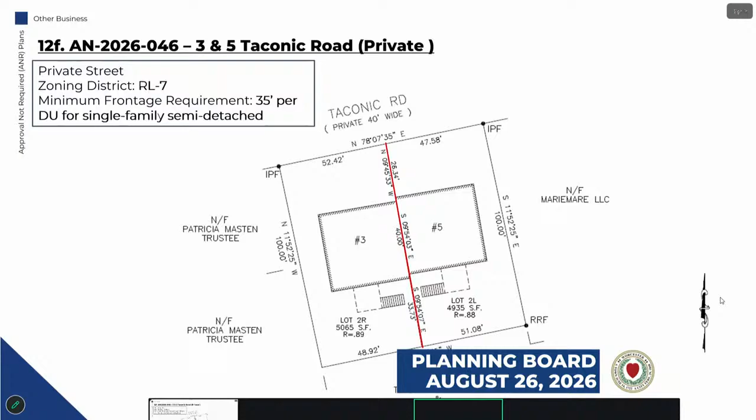Is there a motion on the ANRs? I'd make a motion to endorse ANRs 12B, C, E, and F. Second? On the motion, Mr. McCormick? Yes. Mr. King? Yes. Mr. Delera? Yes. Mr. Toomey? Yes. I vote yes, 5-0. That passes.

No communications or board policy and procedure. There is one communication about a habitat map for rare species. I'm not sure, Olivia, who - through the chair, I apologize, I believe that was a carryover, an error from a previous slide deck. Cool, I think we discussed that at the last meeting.

Awesome. So no communications, no board policies and procedures, and I take it the minutes aren't ready? And no minutes to approve. Is there a motion to adjourn?